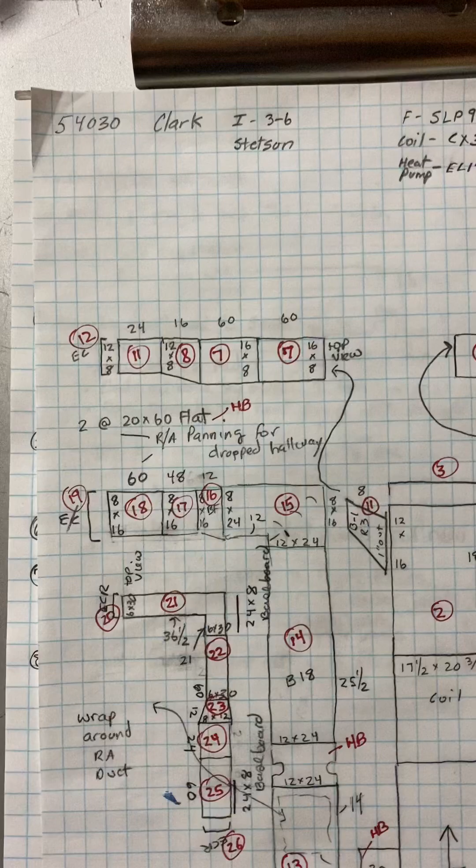Okay, this is on the Clark job, number 54030, installed on 3.6 by Stetson.

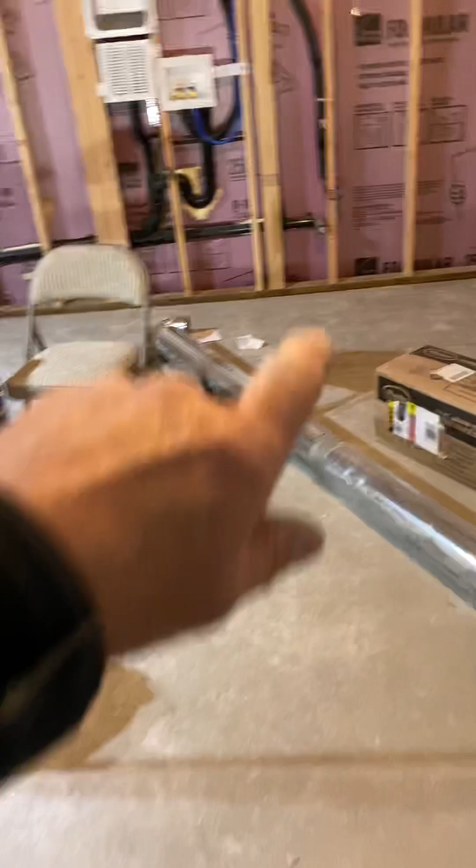I'm going to have to redraw this plan for the city to have an exact. So, anyway, what we're doing is we're adding a furnace in the basement. If you come down the stairs, over here, there's a furnace here. We're going to add a furnace right here in the corner.

Okay, so I drew it on the floor. The furnace will be 6 inches from that wall, 6 inches from this wall, because we're going to have a 6-inch wraparound duct.

So the furnace, we have a base furnace coil, that. Then I have this starting collar, and that's going to sit back 5 inches, which will put your duct 1 inch from the wall. That's not here yet.

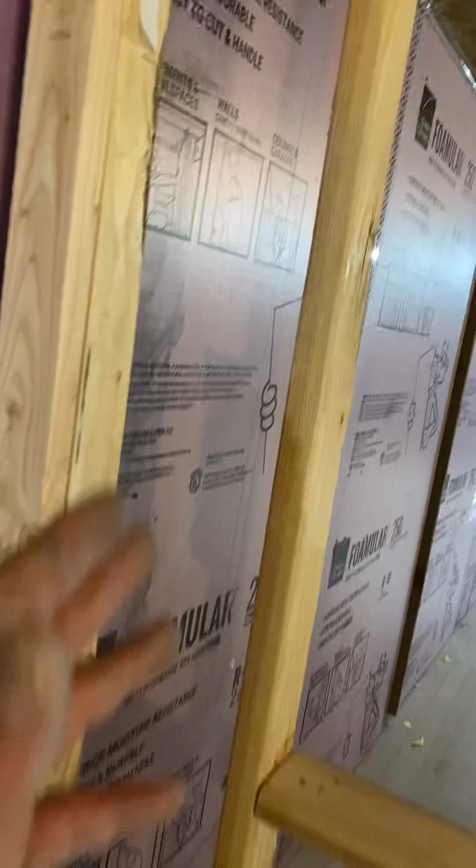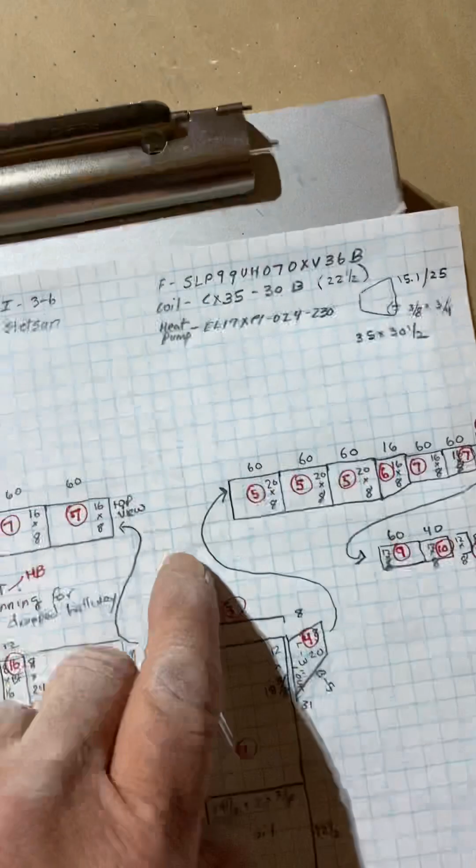But yeah, so you're going to have duct just running straight back, just a supply, all the way to the end. And so that just goes there. Sorry, I ran out of room.

Okay, on the other side, I held it off 6 inches off the wall on purpose. So this trunk line is going to be 6 inches off the wall. But just that reducer, and then this to the end.

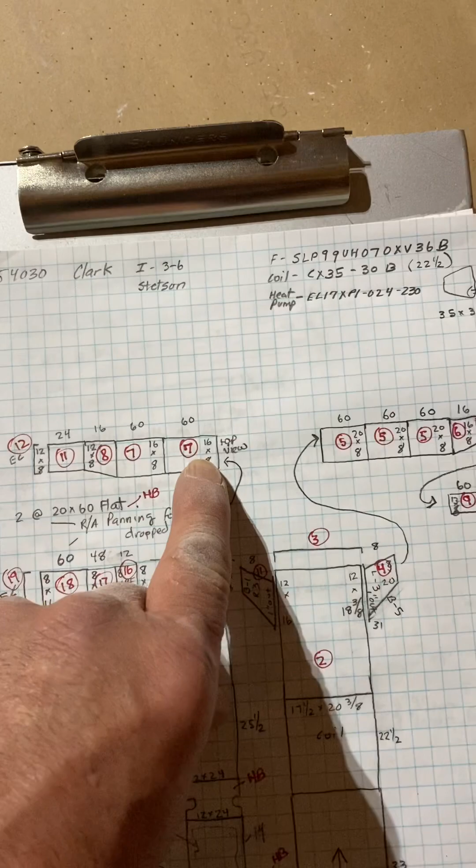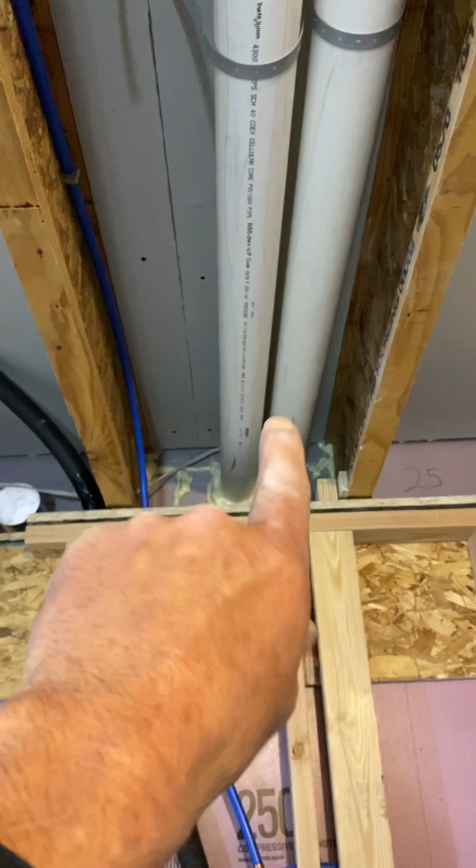I'll tell you now, I held this off 6 inches from the wall rather than offsetting it back towards the wall, because he put his dryer vent right here, except it can't go there because it needs to be 4 feet from the flues. So I'm going to have to move it at least 4 feet from there.

So we're going to have to move it down the line. He didn't want to cut through the joist, so what we're going to do is come up 90 underneath and then hop up and out wherever we need to.

And then this, you can use this for your flues, but I don't think you can. That hole may just be a hole.

Okay. So our return, filter box, that boot, then I have a wraparound duct that's going to go behind the furnace. So this is the filter box, this is top view, wrap around here.

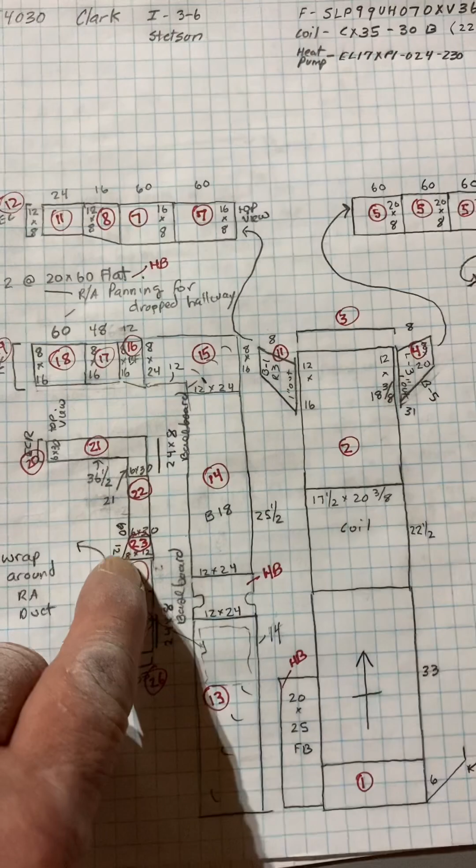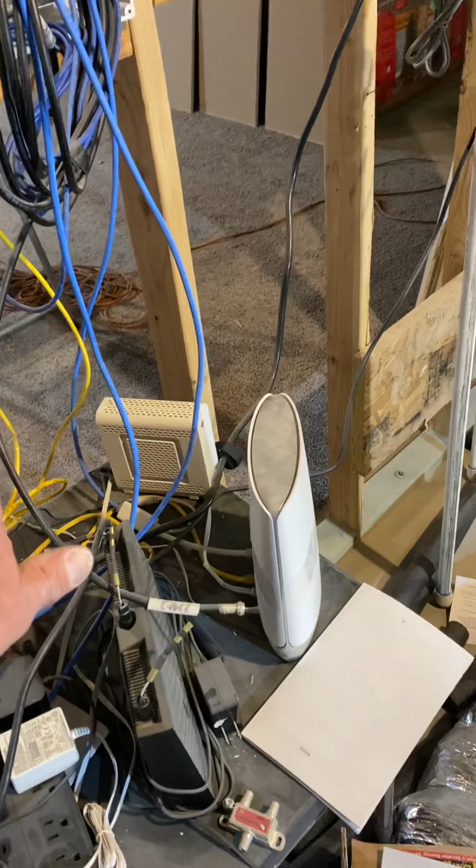So what it's going to do is, you have an end cap right here, that big 90 is going to come here and go to here. You're going to cut in a 24x8 baseboard grill right here, low. Then your duct's going to keep going. It's going to transfer to an 8x12 duct, go behind the furnace.

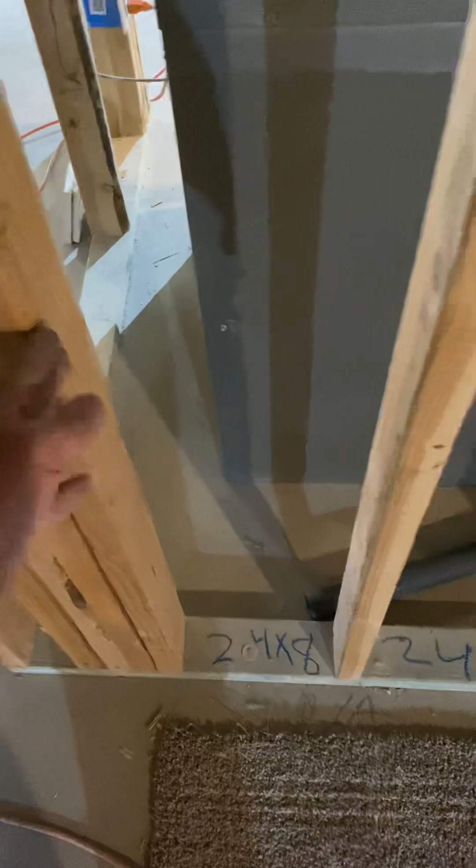And you're going to cut in a 24x8 grill right here, as close to this wall as you can. Reason being is they're going to build this out for a TV entertainment center, and they're probably going to put bookcases and stuff here, but they'll just build their cabinets over this and put their grill on this side if need be.

So those two 24x8s will get all the return air from this side. So I'll make transfer grills.

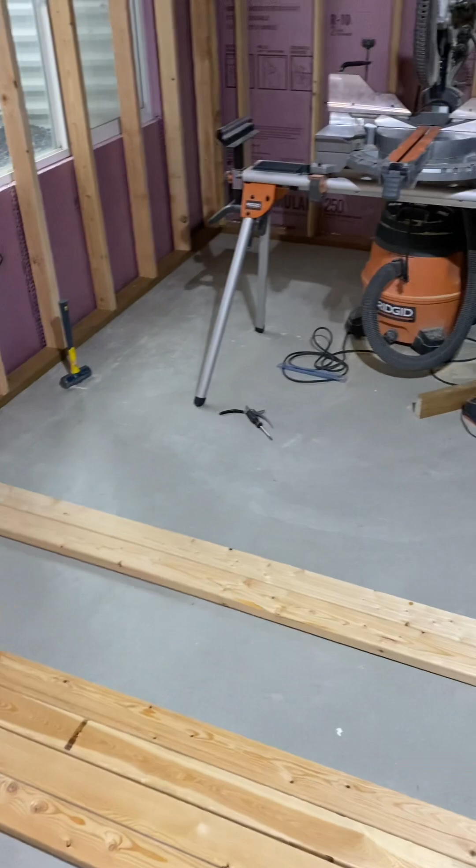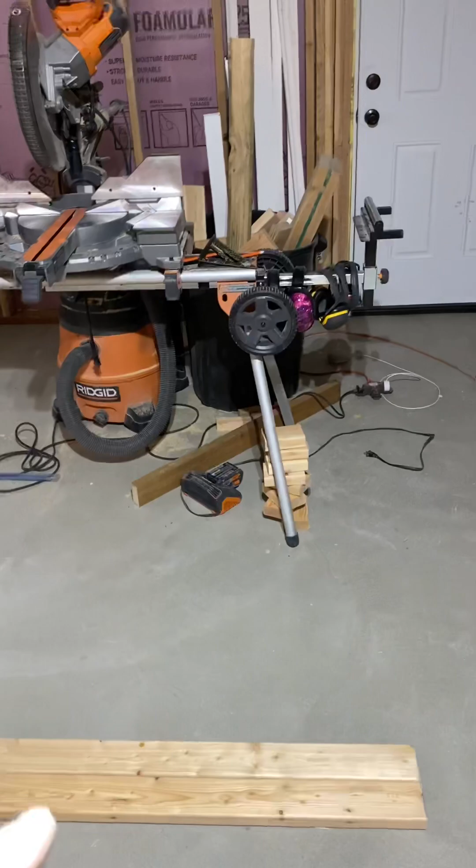So things aren't built yet, but when they are, this is going to be an exercise room. We'll have a transfer grill low in the exercise room and high out here, but we'll just leave them with the homeowner and he'll put them on when he builds his wall.

Same with the office right here. We're going to have an office, and the wall isn't here yet. He said just leave them with the transfer grills.

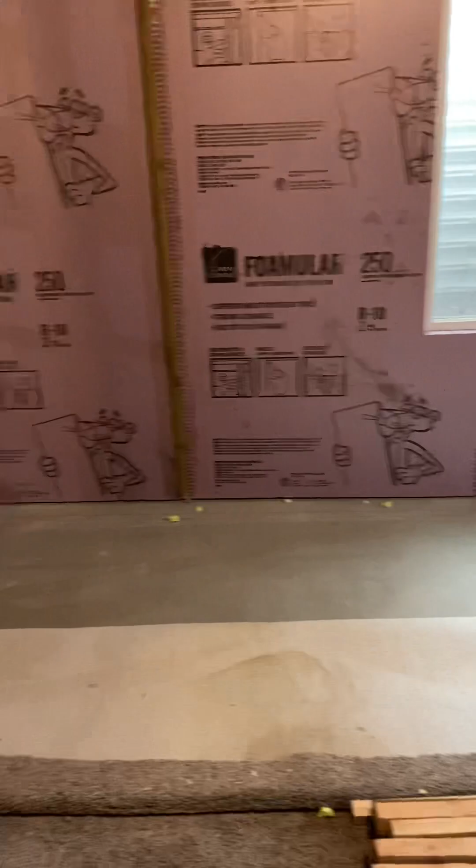Okay. So this person is very concerned about sound. He's probably going to pay to have his whole system, the duct, lined. You can tell what he's done here with the flex to try to make his bedroom quieter. He wanted to do that on all of them, and I told him it wasn't a good idea.

So I talked him into insulating the duct instead. Anyway,

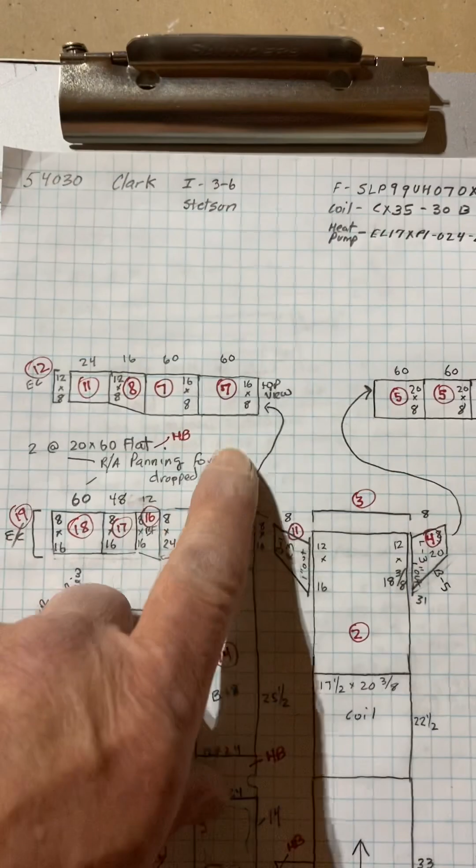Okay, so return air will come up. Bottom's going to come up 18 inches, which will put it 1 inch in front of the supply. And then I just have those couple pieces in the end cap.

So what that's going to do, the return air is going to come up, offset forward and up with a 90, and go down here. So you can see where this line is.

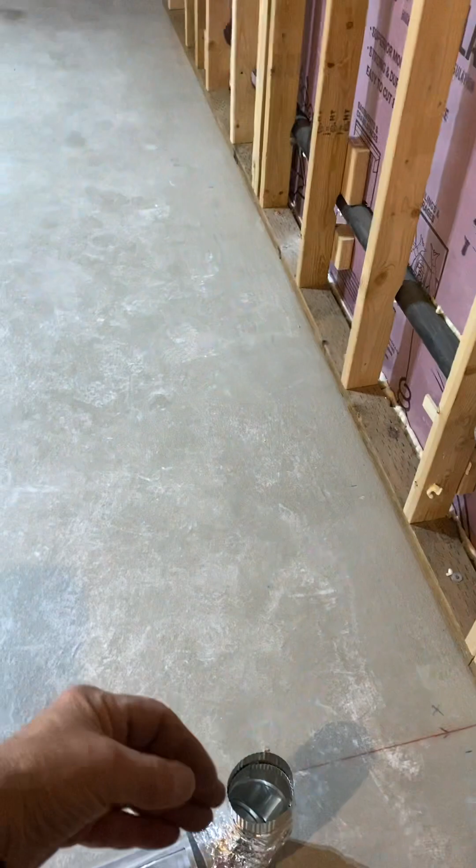They're going to build a wall right here. And so I told them to build the wall after you get your trunk line done, and then you can just cut out the top of the wall and suck the return air down the wall and put a 14 by 8 baseboard grill low for this bedroom.

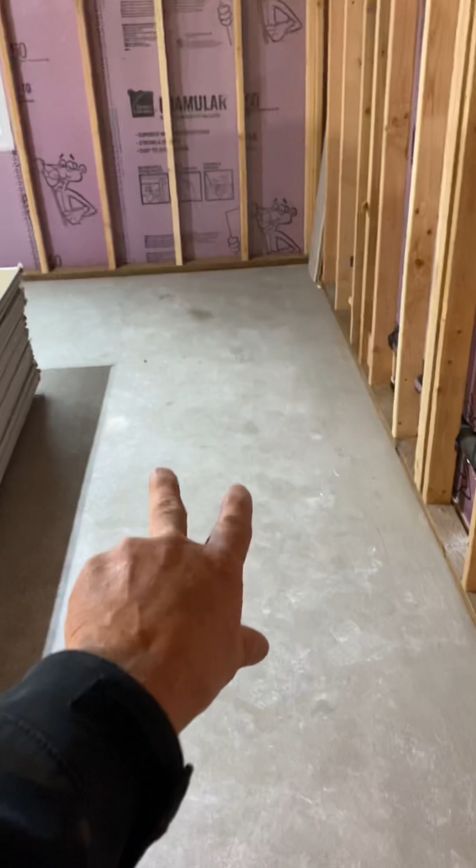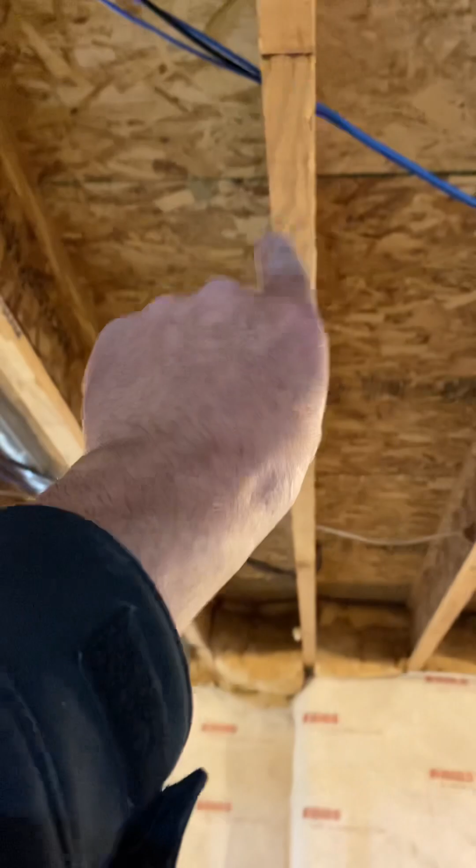Then over in those 2 bedrooms over there, the wall's not here yet. It's going to be roughly about where this line is. I'm hoping it's not right under this beam, but if it is, we'll have to make

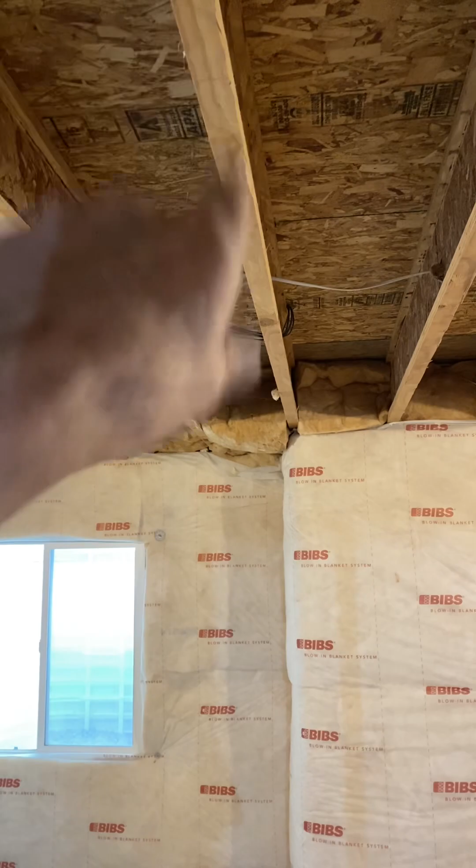some way to get from the return air joist into the wall. I told him it might be a 30 by 8 can, or even longer, because we're going to have 2 bedrooms, so we're going to have a return air, 1 on each side, and you don't want them in the same cavity, so 1 here and then 1 over here,

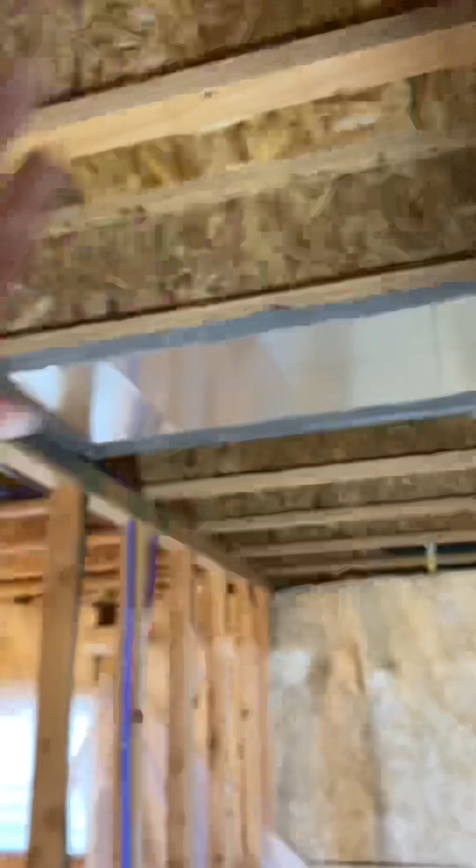but that's going to be a 14 by 8 return baseboard for each one. I didn't give you any panning, except I gave you 10 feet of panning. You're going to need to pan this hallway because they're going to drop the ceiling in here if need be.

So if they do, you'll have to pan this and then pan this over just a little bit. But you're going to need to use probably this joist space for panning, if it works out. I don't know exactly where the wall is going to be, so this one has the flex in it, so I can't really use that one.

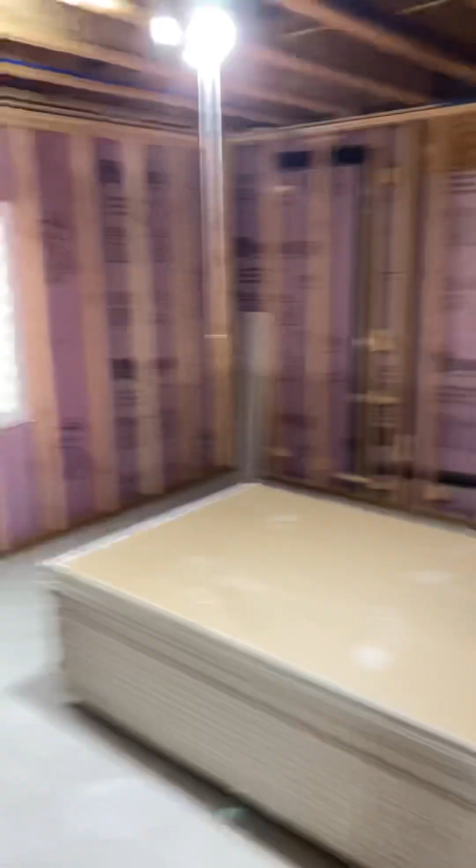This one also is going to have a heat vent in it for the bathroom, but that's big enough that you can still have the heat vent in the bathroom with the return air. Okay, so let's see. Did I go over all the returns? 1, 2, 3, 4, 5. Yes.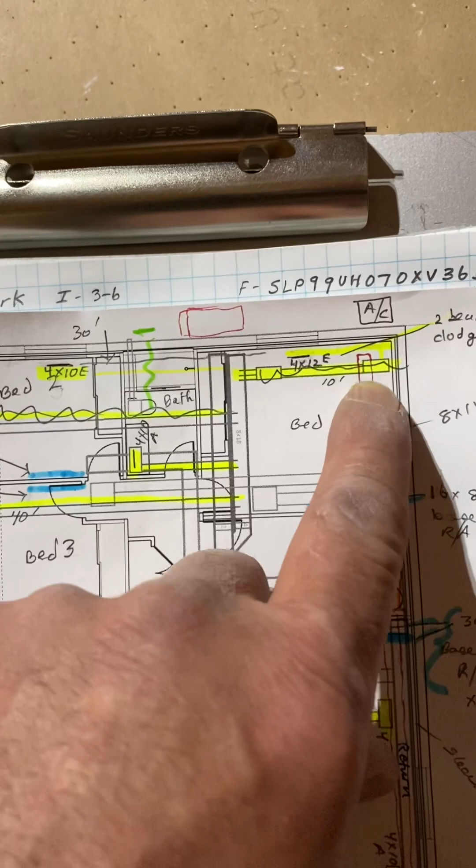Okay, so on the plan, things have kind of changed. For this bedroom, we're just going to put 1 4x12. In this bedroom, we'll put a 4x10. That's going to be an end boot. The homeowner drew this plan originally. He must be a designer, but he originally had 2, and I told him just put 1 here, 1 here.

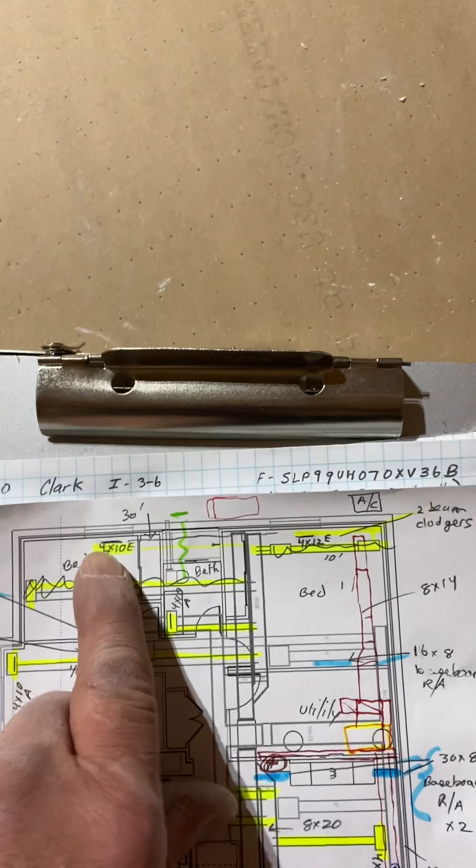Going to have to put them in different joist spaces. In the one over this window here, you can see all this pipe and stuff, so I'm going to have to come off and just go high and get above everything. Should work.

On this one, I'm debating whether to give you 2 beam dodgers or not. I have 7-inch pipe, and you have about 6.5 inches. So I'll give you 2 beam dodgers. Use them at your discretion.

Another thing I have to tell you about this job, why I just thought about it, is I told you he's really concerned about sound. He's going to have 3/4 inch slats for sound everywhere. And then his 5/8 sheetrock, or 1/2 inch sheetrock, whatever he's going to put in. He said 5/8, so verify exactly how low your boot's going to go, but

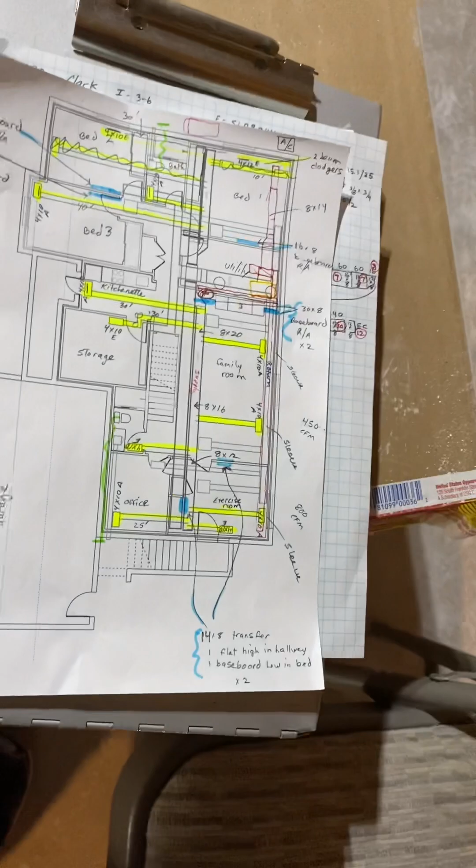you know, you need to drop your boot down lower than 1/2 inch is what I'm saying, for all your boots in the whole house. Probably down, see, 3/4, so probably 1.25 to 1.5 inches, depending. Okay.

That bedroom, heat run just as it shows. I'm going to put a kitchenette here. I'll just walk around. So they're going to put a kitchenette right here, and they have a heat run drawn just over the door here. This is going to be storage. They do have a heat run drawn in the storage.

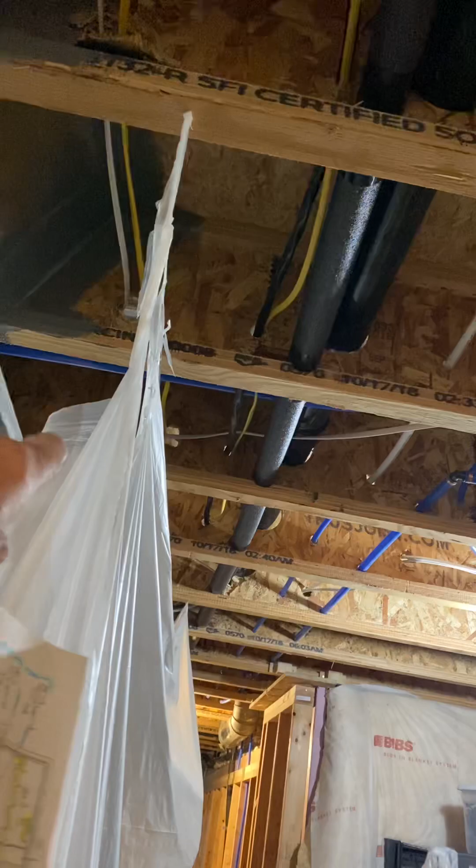And so there's a heat vent right there. This is return air panning. So if you want to there, have to come over here, 90 down, 90 over, and I'll give you an end boot. If it were me, I'd just put a sidewall into the side, just,

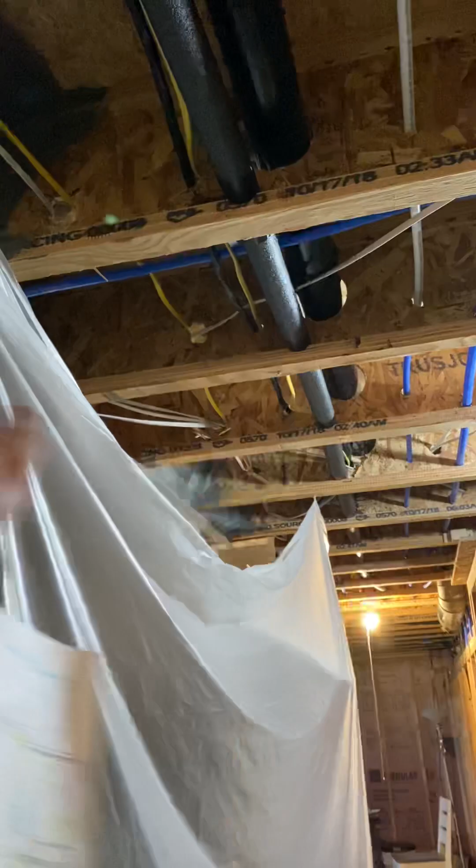or down, and they can fur around it. I'm not sure how the framing is going to go right here, but I'm going to fur it out for this anyway, so somewhere they're going to have a fur out. So if you just go side, that would probably be good rather than, you know.

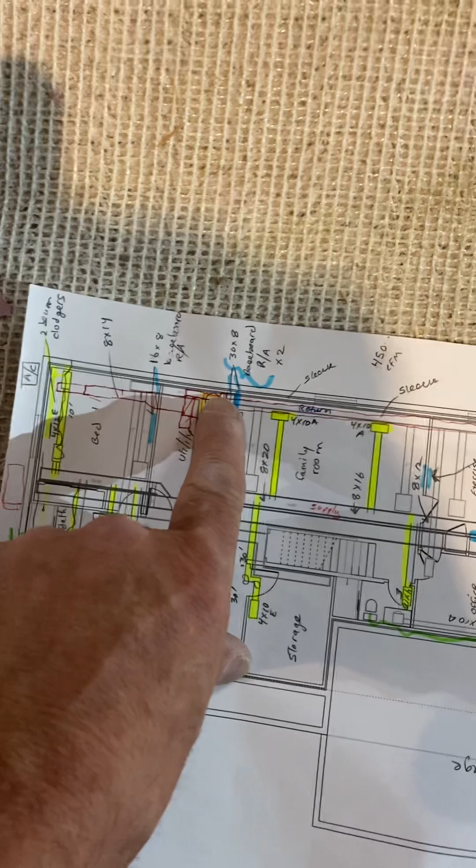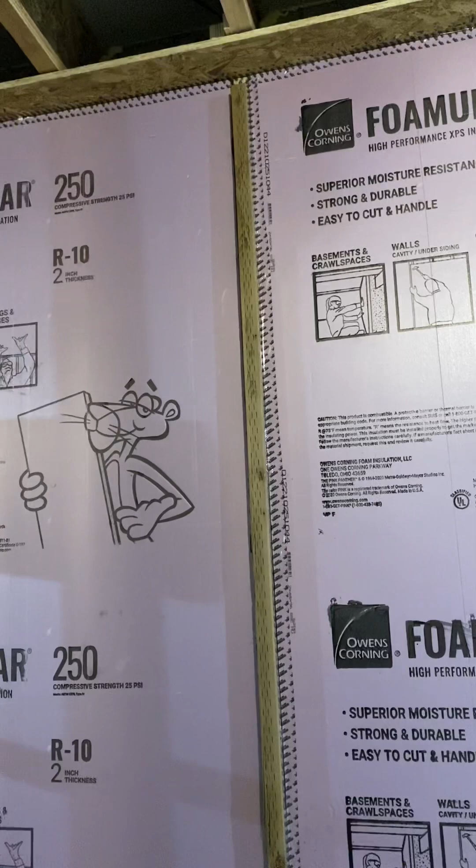Okay, so the plan has kind of changed from what was originally drawn. Our duct is now going to be just straight over against this wall. So these 3 runs are just going to be bottom takeoffs. I'll just make them 2 inches long right out the bottom of the duct for those 3.

That one for the office, he's very concerned about. He wants it super quiet. He might do something with flex there. Not sure.

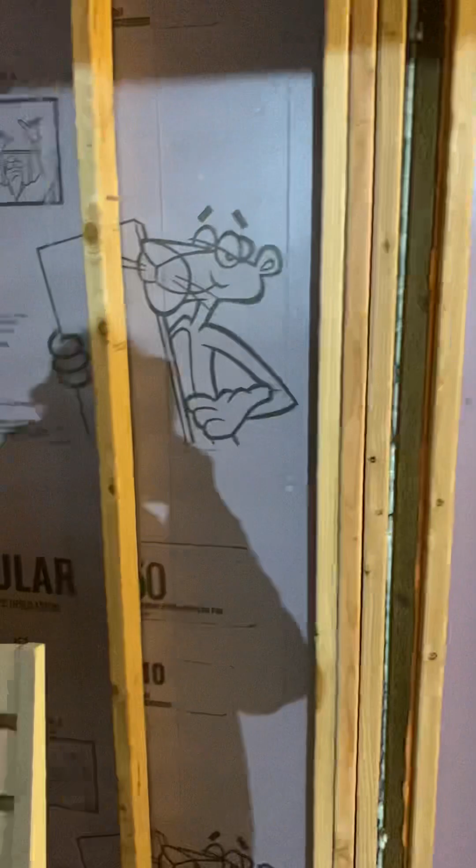Okay, so this is his office. We'll just put a run over here somewhere. He is going to fur this out, FYI, so keep that in mind.

This is a bathroom, so we're going to have to get a run in the bathroom right here and put one right here for that. What did I put on there? Let's see. Bath. Yeah, I put an end boot. Yeah, that's what we want.

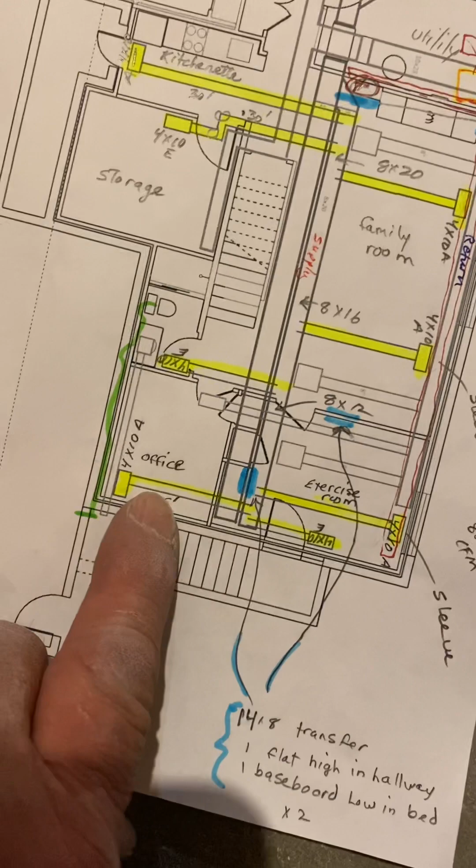Okay, then I had one over this door too. Okay. Okay.

Oh yeah. So the exhaust fan for this bathroom. Was it run up, and he's going to fur out this little corner. So you're going to run as tight as you can over here.

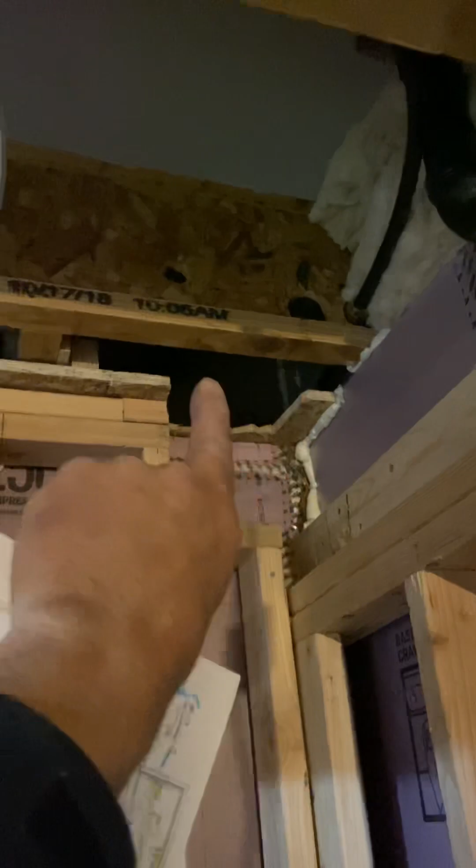And then he cut out this little area over here. You're going to go up and out. And his outside garage wall is right there, so that's the corner. And you do have a basement access right there.

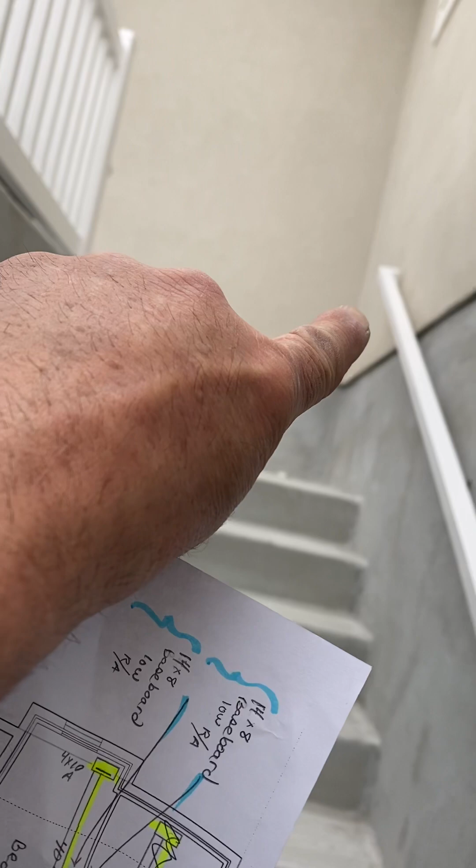So it's gonna be coming out right over there somewhere. Okay.

The other exhaust fan is going to be in this bathroom, and he's going to fur out as well for this one. So come up and run it underneath, and then up and out.

I told him it's close, but we might be able to cut 4-inch holes right through the center because you're at 6 feet, but if it was 6 foot 4 inches, then it would be within code. So he may just want to fur down because he was asking about that. You got to be 3 foot off a bearing wall for a 4-inch hole.

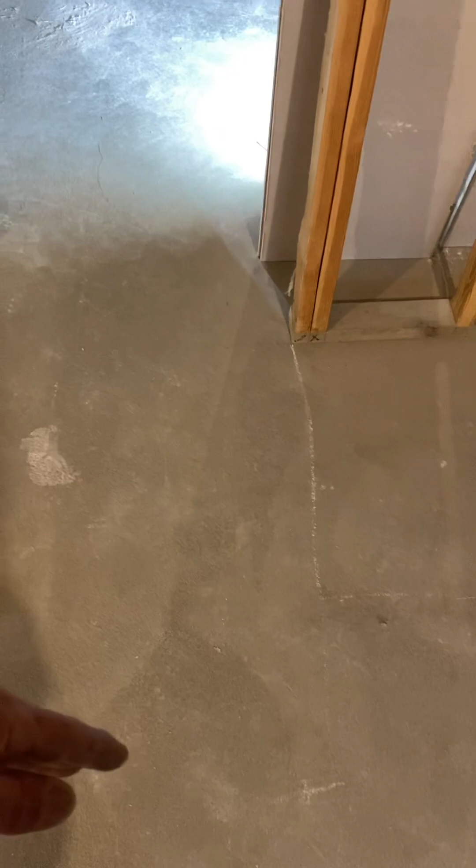Okay, so as far as these returns go in here, the reason we can't come down here is because this whole thing is going to be a closet here, and this is going to be a closet here. You can see on the white line. He said this door is going to be moved up, so if you can pan over and do something with those closets and get a grill here. But it's kind of hard to picture without the walls there what you can do.

So you're going to have to figure out these return airs when you can. I told him to try to have this wall built for when you get here, so you can know what to do.

Okay, so I think I got everything there. Oh, on the venting for the bathroom vents.

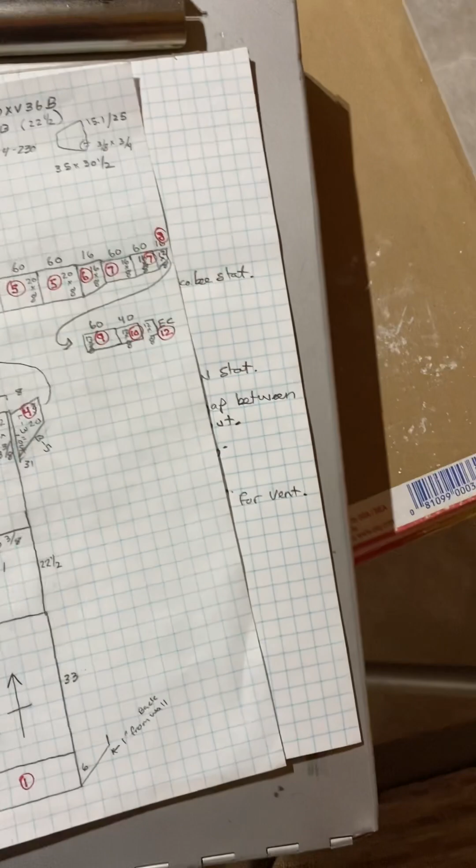So I just gave you 25 feet of flex for both of them, so just split that up. I also ordered you some pipe, so you can run 5 feet of pipe on each one, then flex the rest of the way, kind of split it up.

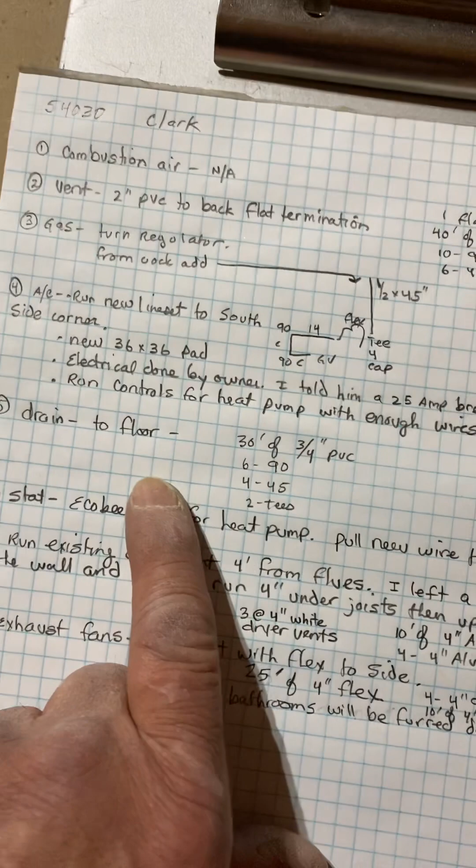Okay, combustion air, not applicable. Vent, you're gonna run 2-inch PVC just to the back of the house. There's already 2 penetrations out there in the dryer vent. I figure you're probably gonna go right here.

If any way you can use that hole, use it, but if not, just do them where you can and he'll just deal with the hole. But yeah, flat termination there.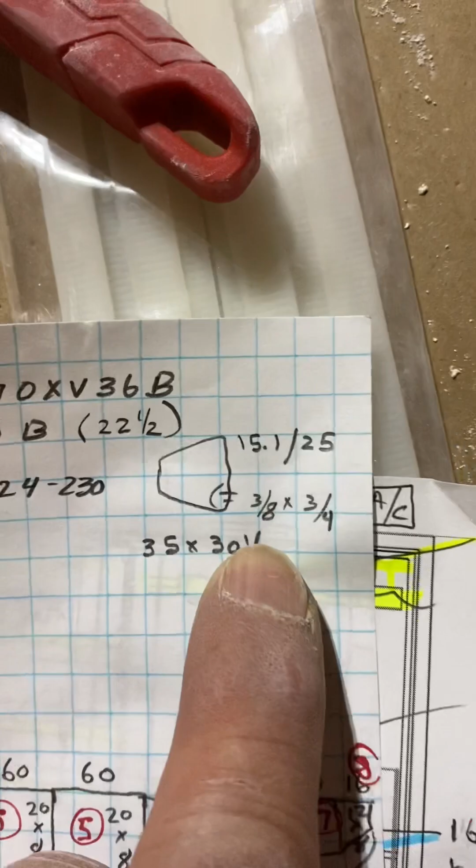New line set. So the line set needs to be 3/8 by 3/4. This is a heat pump, by the way, so make sure you run plenty enough wires for whatever controls you need out there, because it's going to be an Ecobee thermostat, so it's not going to be communicating. So I told Jason, the salesman, to order whatever controls he needs.

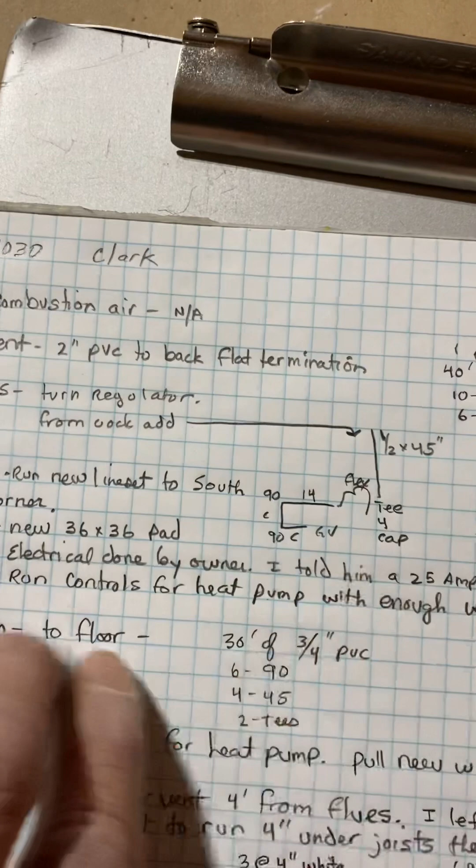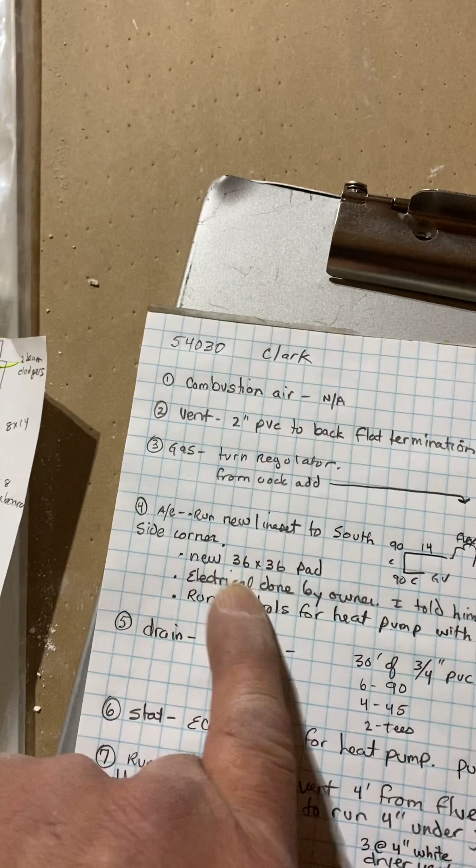The Ecobee, I believe, has its own set point, where if it's lower than 40 degrees, it will come on, but I don't know what else you may need for out there.

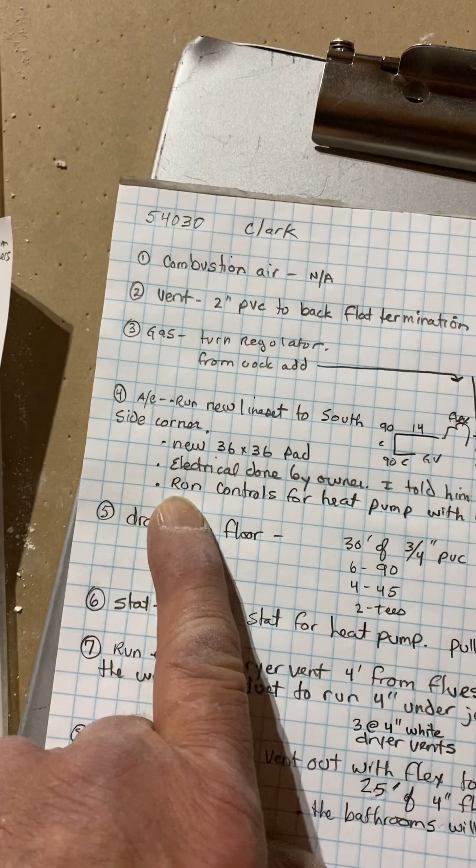Okay, new pad, electrical done by the owner. I told him the breaker we need, 25 amp. Run enough control wires for the heat pump. The drain, just go to the floor, right there. You're going to be running from there.

So you will also need to redo this drain just a little bit. So I need to give you a little bit of 3/4 inch PVC.

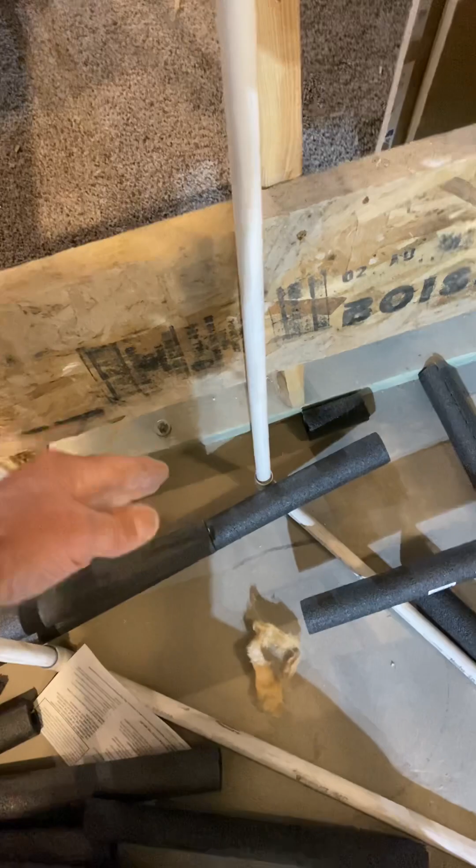But we're going to have an 8x12 duct coming low. And they wanted to do it 8x12 rather than keep it high, because they wanted the space open right here. That's why we converted to 8x12. But anyway, measure that. What's that? So yeah, that'll be fine.

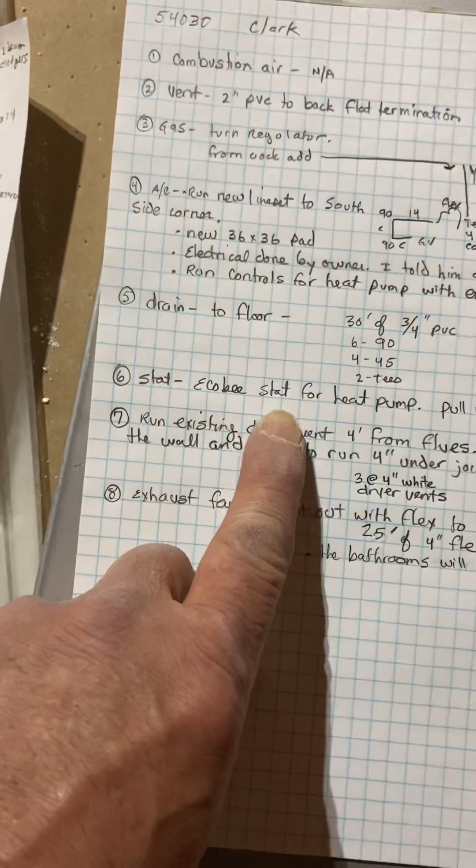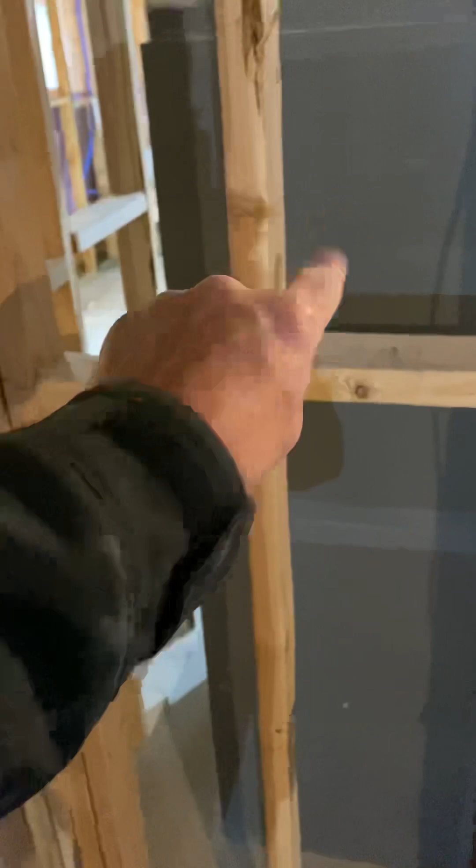Stat. Okay, so gonna put on a new Ecobee thermostat, run a new wire. Unless you know a better place, I told him we'd probably put it above this return air right here in the corner. So that's that. Make sure you run enough wires for it.

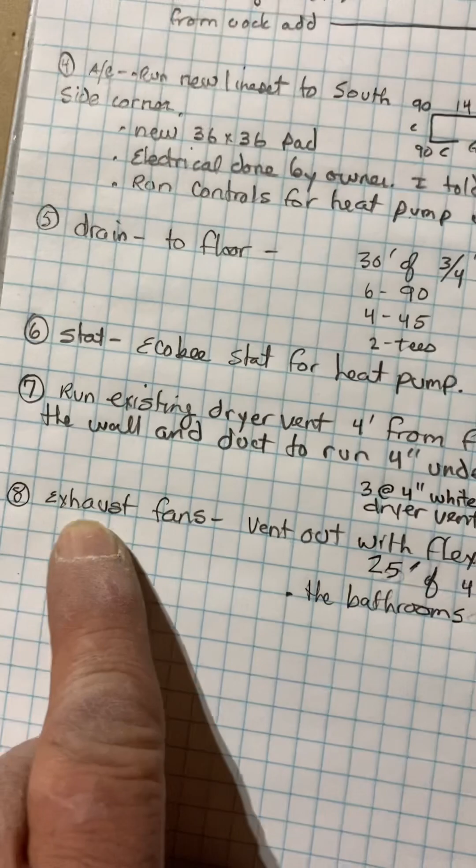So much going on here. I don't know if I told you about the existing dryer, but yeah, I did. I told you about that. Okay, exhaust fans. I told you about that. I believe that's it.